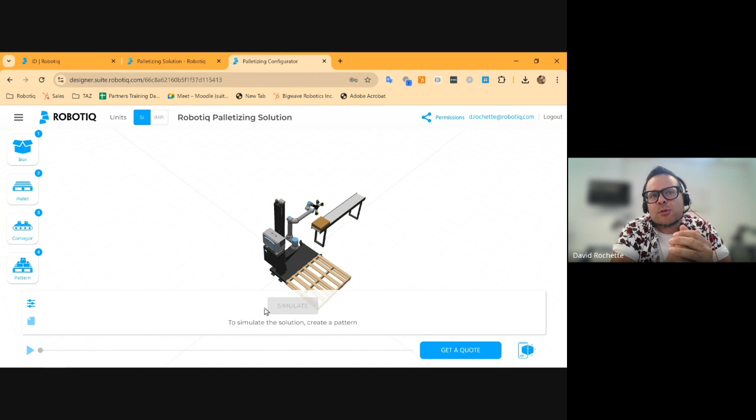At the bottom, for now it's grayed out, but you will eventually see the simulation results. You will see which model fits this application, and you'll see some KPIs as well, in the sense of key performance indicators, basically metrics like how many boxes per minute this configuration can do, and so on.

All right, so should we get started? Anything you'd like to add for now, Kendra?

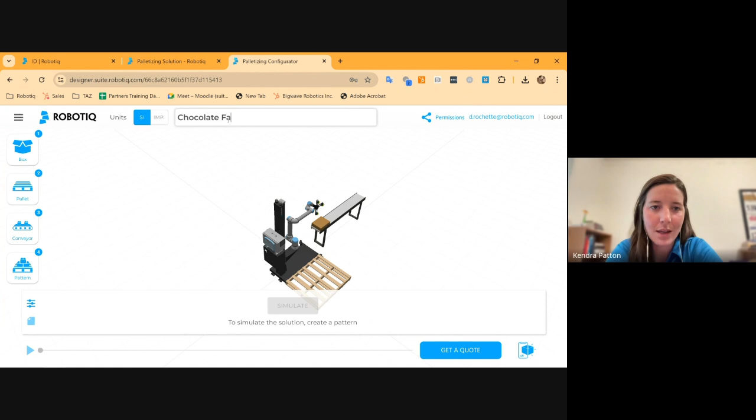Just an important note, the top bar also allows you to change the name. So if you want to keep track of all of your recipes and make it customizable for your customer, you could put in SKU 1, 2, 3, 4, or call it whatever you might call it, customer name and whatever describes that SKU you're running. So, Chocolate Factory X, and then the type of box that you're running. Also, note that the unique link is now created at the top.

So the URL is now a link that is custom for this simulation. Now that you've logged in and created a true project, it can be shared directly with the customer as well. That's another way to share, just something different I wanted to mention.

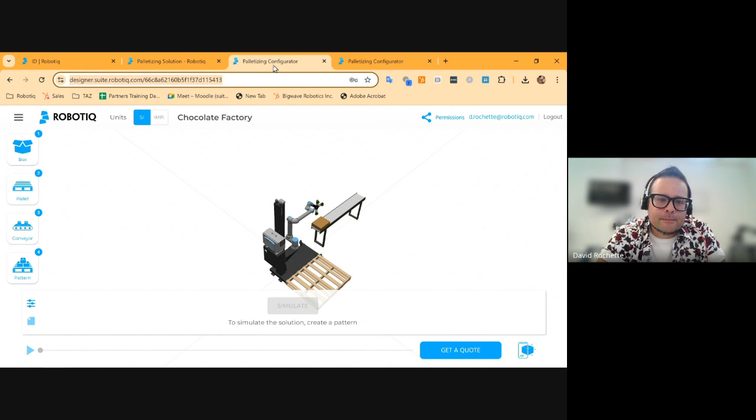I'm showing here that you can copy and paste that link in another browser or tab, and it will take you to that exact simulation. All right, let's go back to our main page here, Chocolate Factory.

So the first menu is where you can enter the box dimensions. We can stick to the default values for now, or just enter a mock value. If you put imperial, I have my go-to mock one, I can share that with you. If you switch over to inches, that's how my brain works. Go ahead and put 12 inches for the length, 10 inches for the width, and then make the height 8 or 9 inches, something like that.

The weight is a really good indicator that will lead to a different model of palletizer. So maybe we put in 30 pounds in anticipation of trying to... actually, would you do 20 pounds, David? Then it'll show both options.

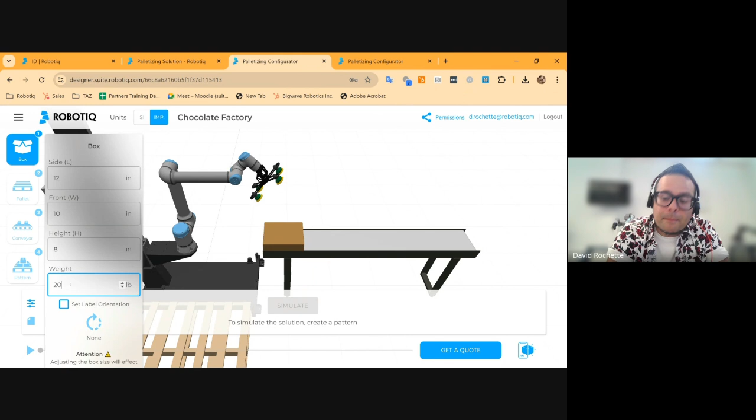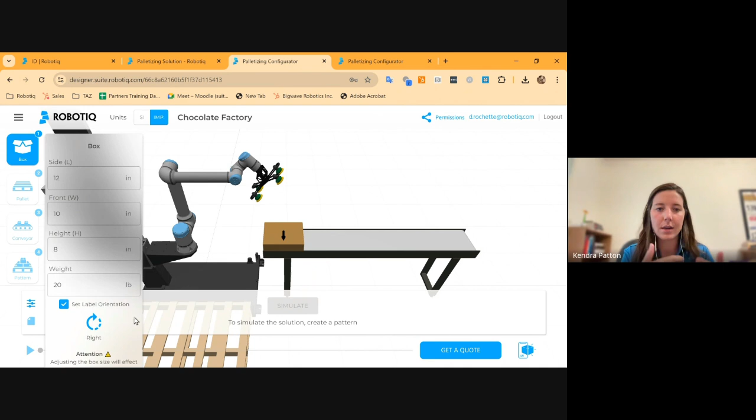And then if you set label orientation, that's an important thing to show as well. Once the weight is entered, the label can be set to a certain side. In the food and beverage and pharmaceutical industries, we see the need for a label to be set on a certain side is very important. That allows, when you build out your pattern, the arrow will indicate exactly where that label needs to go. So in this case, the side of the conveyor, it's coming down, it hits a label before it gets to the end stop. That's perfect.

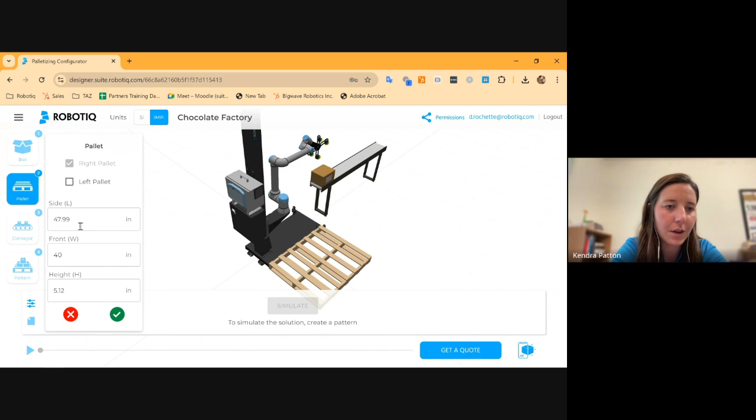There's a button to accept that editable box. It seemed to not want to show that on David's screen, but that's perfect. And then for the pallet, if we make it 40 by 48 inches, it defaults to 47.99 or something like that, so if we come in here we can make a typical 48 by 40 inch pallet.

In this screen, you can also choose the left and right pallet. So maybe select the left pallet as well. If you're trying to analyze the full scope, most people use both pallets, so I try to always put left and right in there as well. I think that should be good for that, David.

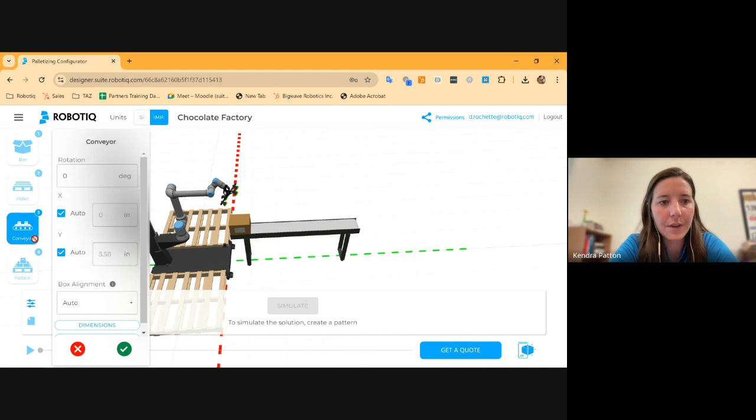And then the conveyor, maybe just pop it open. We don't need to make any edits, but the conveyor will automatically default to the width of the box, so that's kind of the auto default. But again, if you want to rotate it 90 degrees or change the distance away from the palletizer, if you're trying to replicate exactly what the customer has, that's all possible in this screen. Look at that, that's a great indication of how it can be reoriented as you see fit for the project.

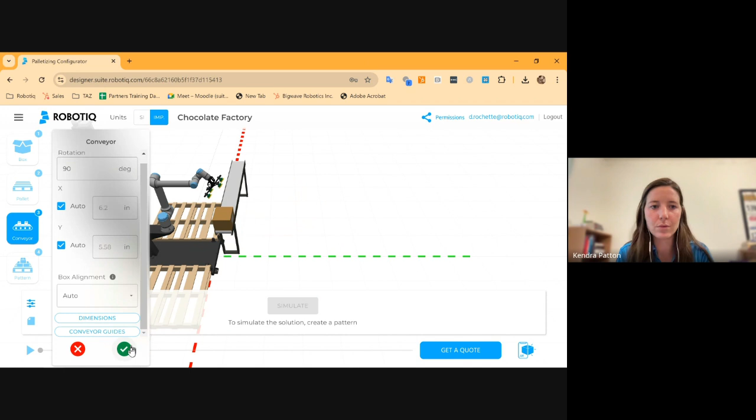And then if you look at the pattern, the next thing we'll do is build out our pallet pattern. This is probably the most important part and what helps customers really visualize how it could be their project. If you want to walk through this, David, I think you probably know best about how all of these buttons work now, but essentially adding one box at a time is the default, right?

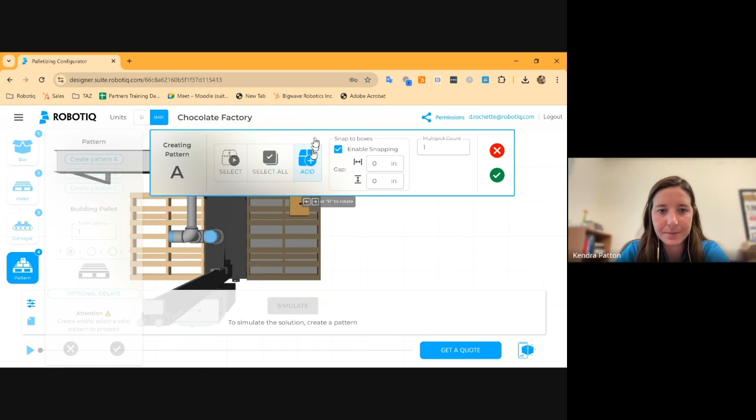Yeah, exactly. So here... sorry, there's a little bit of a lag. Okay, so adding boxes, this button will let you add boxes, and then you can simply drag and drop it on the pallet.

The arrows will allow you to rotate it, right? So you want to show the label on an outward facing edge of the pallet typically. So then I can simply go and click. If two boxes are overlapping, they will show as red, and the system will not allow me to place it there. So I can simply go ahead and make the pattern.

Now let's say I wanted to have a standard or regular gap between the boxes. Let me place this first one.

By default, snapping is enabled, so it will automatically try to stick to the edge of the existing boxes or the edge of the pallet. But I can also add a gap. Let's say I want a half an inch gap in X and Y.

So now it will always snap to half an inch from the boxes that are already there. That can be an interesting tool if you know you're going to have gaps, or if you want some gaps. Now let me just select all and delete them.

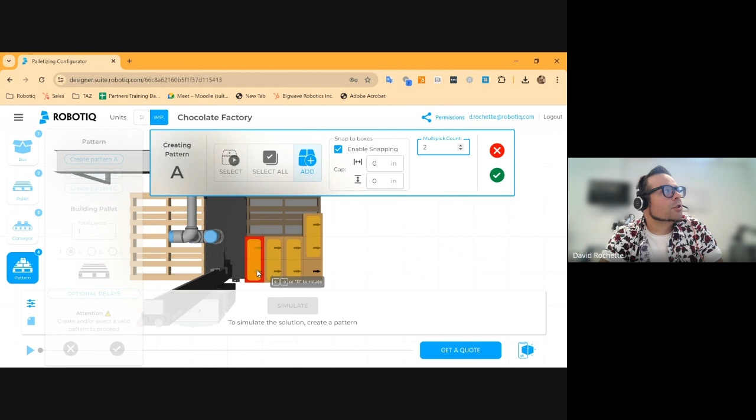I'm just going to go ahead and put some of those. A really important thing is you'll notice that the short side is connected to the other short side of that - it's called short side leading. That's how it's coming out of the labeler, and the two sides are both the short sides.

If for multi-pick the length is too long, picking two at a time doesn't seem reasonable. In that situation, you'd go back to the box screen and switch the length and the width, and that'll force those longer sides to be side by side.

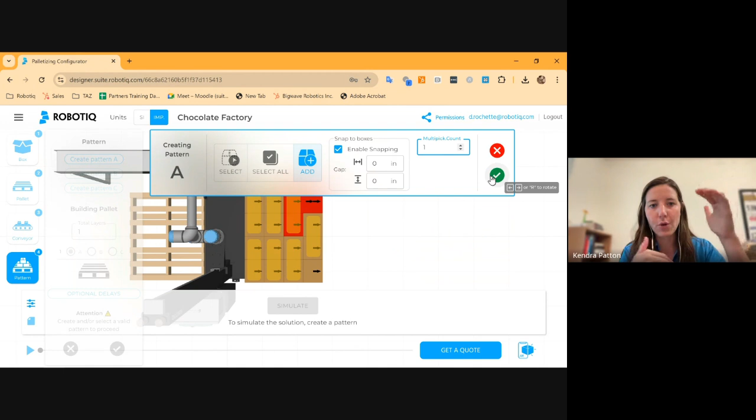That's a great example of picking two boxes at a time, and then building out the second layer. If you had alternating layers, you can go to Create Pattern B, and a really cool new feature is the ability to copy your pattern A.

If you had to mirror it or rotate it, you could easily do that in this area, which is awesome. We've been wanting this feature for a very long time.

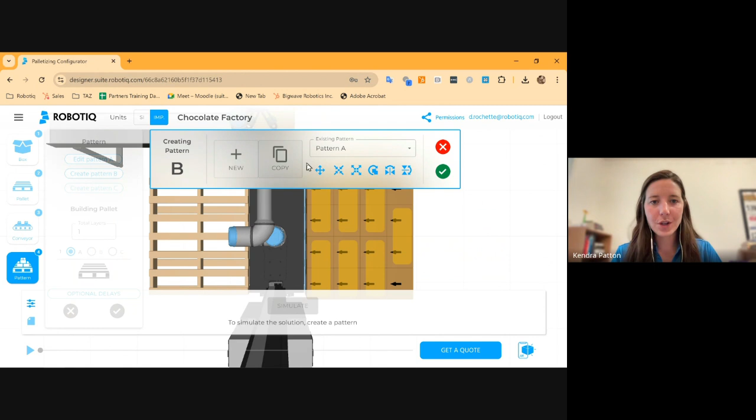So then it could be interlocking, and you can rotate as needed with these different tools. We don't need to go through all of them, but you'll notice you have the ability to select the whole thing, move the whole thing, rotate accordingly, instead of sitting there doing each individual box.

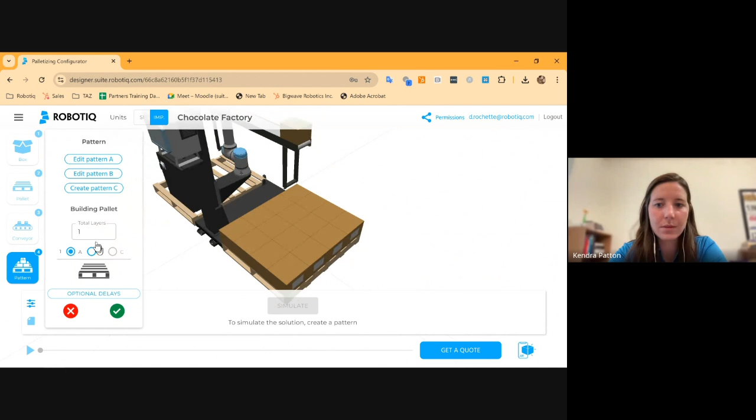Often we see A-B rotation in the different patterns, but we also have the ability to do a pattern C. So if the last layer is like a partial layer, we can represent that in the tool as well. Let's just put in maybe six layers, and then we can show how that populates the alternating A-B.

You could always come in here and alternate A-B. I don't think we created a B pattern, so we can keep it as A for this representation - very easy to indicate that, and customers talk about that often as well.

Oh, you did put a B in there. Oh, perfect, yeah, I did. Very good - we got alternating A-B then.

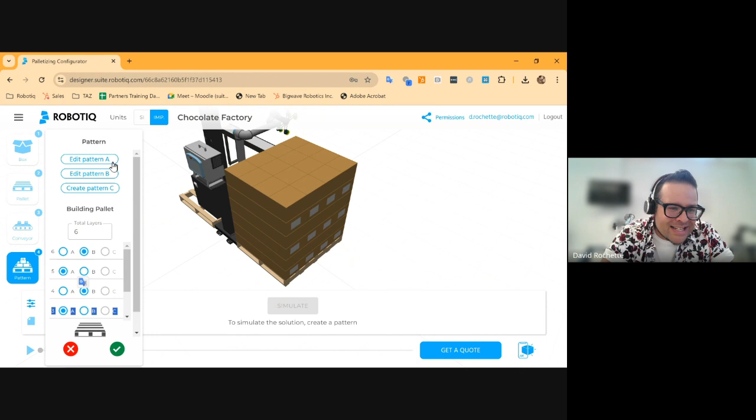Maybe just one last quick thing regarding the patterns - some interesting features. When you select all, you have the ability - now the pallet size won't allow me for now - but you have the ability to center everything on the pallet. So if there were some gaps around it, it would center everything.

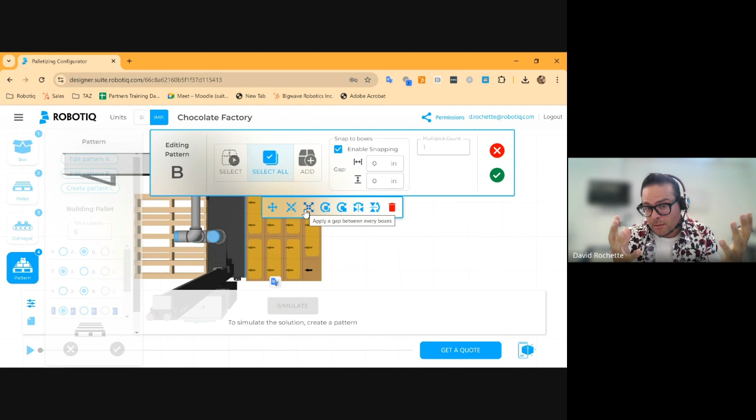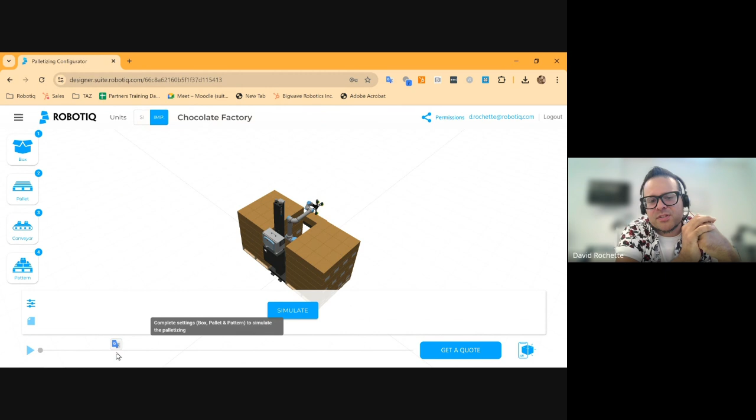All good, right, so we have our layers. We notice that we can create up to 3 patterns, which is sufficient in most cases. On the actual palletizing solution, the real one, you have the ability to create as many patterns as you want. But what we typically see is 2, an alternation of A and B, and sometimes a C1 for a last layer that would have less boxes, for example.

Alright, so the very next step, good. Once all of that information is entered - box, pallet, pattern - then we can go ahead and hit simulate. And this is really the moment of truth. It's going to pick the best model it sees to represent what information you put in.

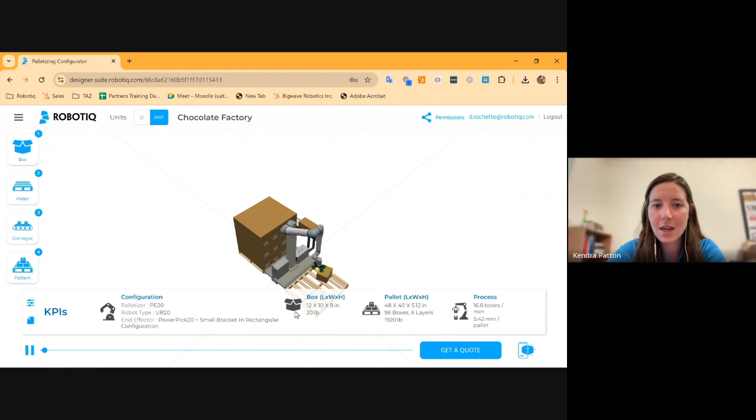So if you recall, we put in a 20-pound box, which you think fits the UR10. But in this case, we're picking 2 at a time. So because of that, it defaults to our PE20 model, which is represented very well here.

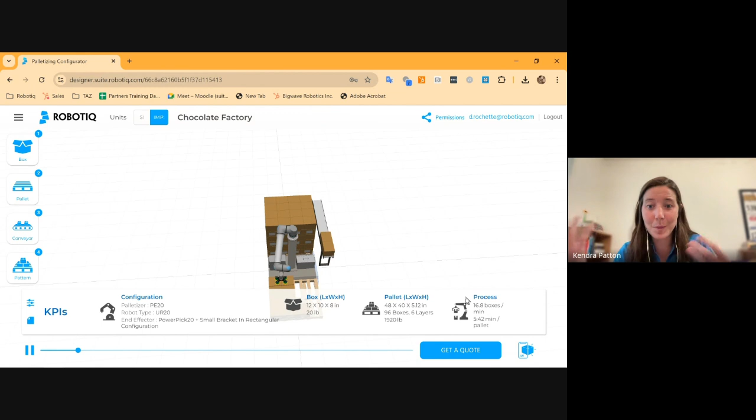So to David's point, it shows exactly all of that KPI information. What's really impressive is you see the output of like 16.8 boxes a minute. In the past, with limitations of payload, we were not able to really exceed 10 cases a minute, 11 cases a minute. Now, with the ability to pick multiple cases at a time, we're now in that upper range of 15, 20 a minute in different instances.

And that's really opened the door to a lot of situations where we could not provide a solution in the past. We now have the ability.

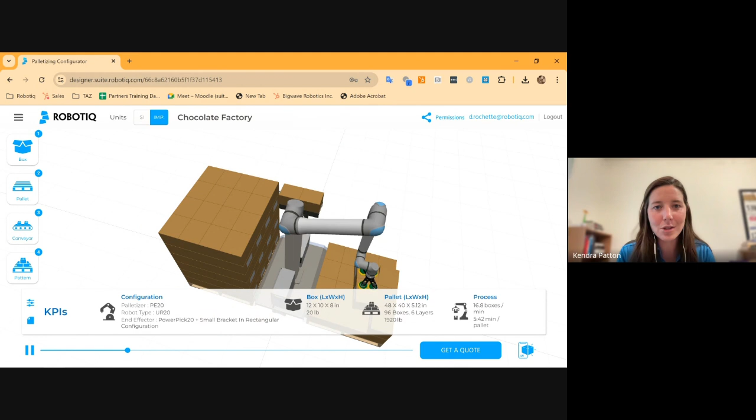So this is a great tool to use to represent possibilities with customers. The hardest part is really getting that information from them to then generate this. So I often give them an example of one that could be used, but ultimately that link at the top is a live link that can be shared accordingly with your customer.

And you could do this over and over again for all of the different SKUs. Or, as David mentioned, the multi-recipe feature is a good way to organize if you know you have multiple SKUs on one line. And what you'll see here is the palletizer that was chosen.

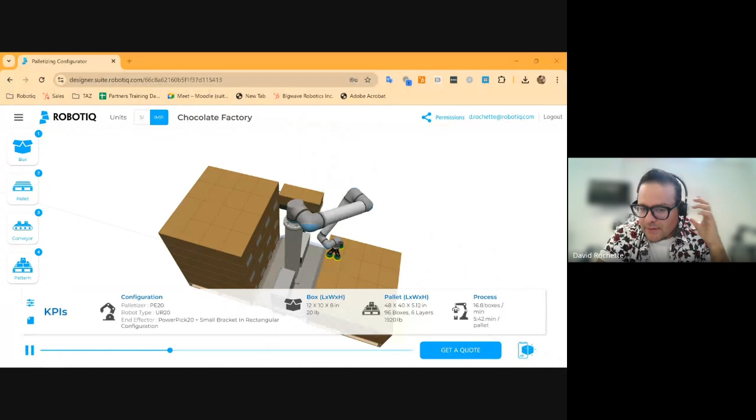It doesn't mean this is the only one that will fit, but it's probably the most efficient one that has the best cycle time for this kind of application. You will also see the robot type and the end effector.

Now this one can be a little bit hard to grasp at first sight if you don't know our family of grippers. But basically, PowerPick is the standard vacuum gripper that Robotiq has designed for a UR20.

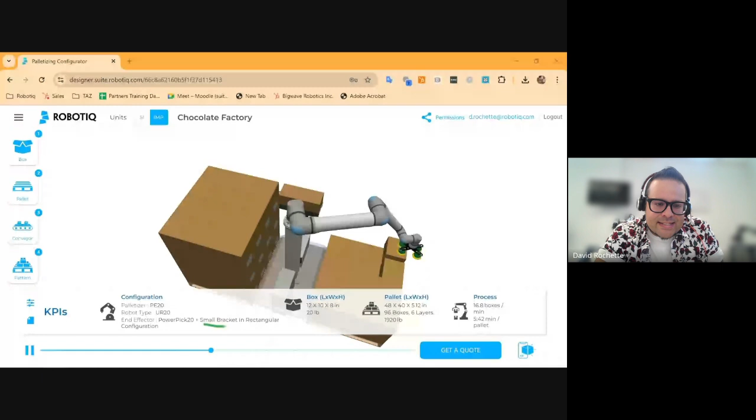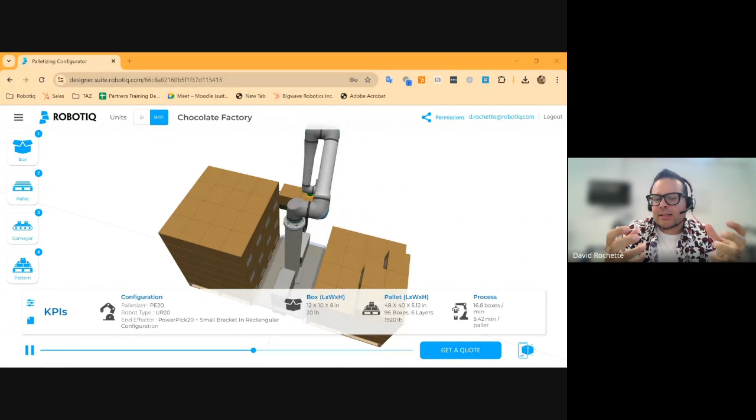Then it says small bracket. So we have to know that there's 2 configurations with smaller brackets and bigger brackets depending on box sizes. Now both brackets will come with a PowerPick kit. So all you need to know basically is that for this order or project, you would need a PowerPick 20, and then the small bracket in rectangular or square configuration are simply just how you assemble it, but the PowerPick kit itself will include all of those configurations.

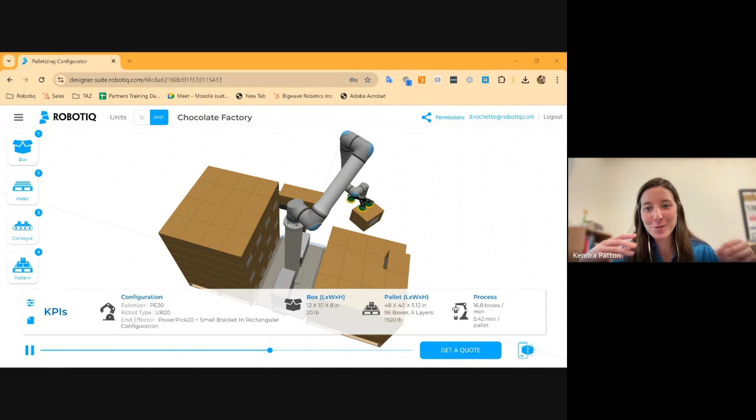Great point, David. And the more you analyze, you might see that might not be the best gripper, right? The better gripper for a 20-pound case - you might not trust that 2 vacuum cups is enough to pick a single box, in your configuration.

So there's another hamburger menu near that KPI name that you can actually take it to the next level. And say you wanted to look at a different model - as David mentioned, it just kind of defaults to what is best for throughput. But in this section, you can go ahead and create, you could select the UR30 to generate an AX30 model. You can indicate different end of arm tooling.

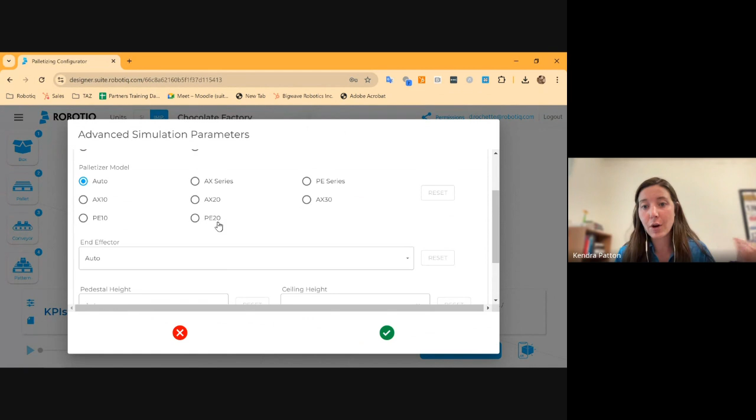So say you had a different name brand gripper off the shelf and you had the TCP information for that, you could go ahead and enter it. Or if you wanted to take a look at what this would look like with a larger configuration of PowerPick as well. So a lot of different options in this advanced menu.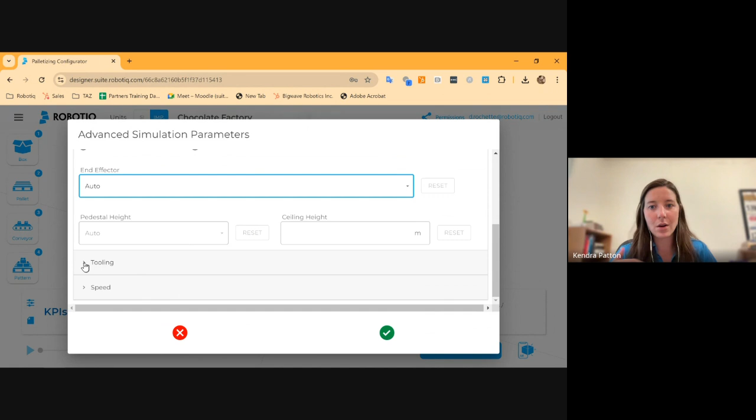And honestly, I'd say that our coaches are really good at taking a deep dive into this. So if you get a simulation that pops up and says it won't work, feel free to share the link with us. We're more than happy to figure out how we can get it to work, because we know all the ins and outs. And also, feel free to go into this advanced screen and start nitpicking a few of the different items as well. You'll see kind of the subset of areas. Speed is very important as well.

So say the customer desires a rate of 17 boxes per minute, and I know that we're at like 16.8. You could come in here and increase the default speed without the payload to maybe 2 meters per second or 3, and now we will meet that rate. So that kind of shows different ways in which we could meet the customer's needs.

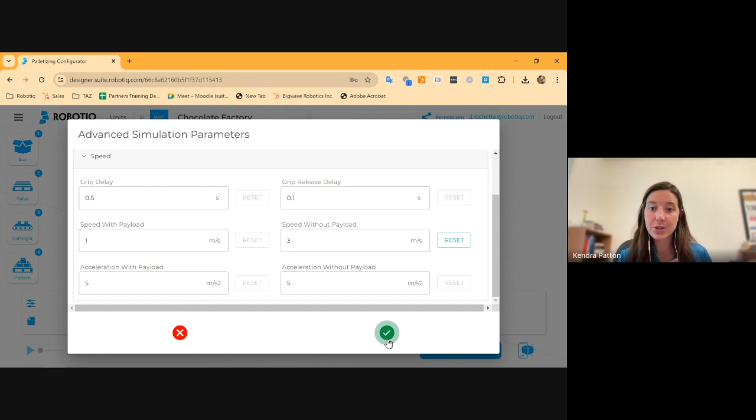Understanding the speed settings as well, everything defaults to 1 meter per second, which is that collaborative guideline. So every simulation you do will result in that default unless you go and edit it. In general, the threshold is about 2 or 3 meters per second, where it kind of stabilizes, and it can't get from point A to point B any faster than that. So that gives you a guideline on what you could enter.

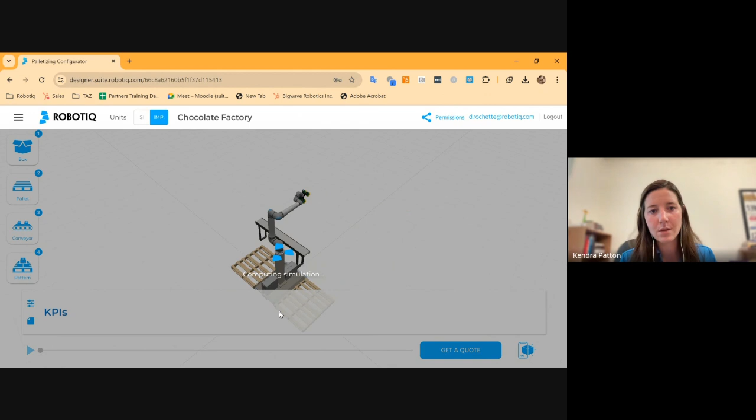But now you can resimulate with those new settings, and you'll notice some changes in the simulation as well. So it becomes kind of a live edit. Now we're meeting that rate the customer desired, and the new link exists with those edits.

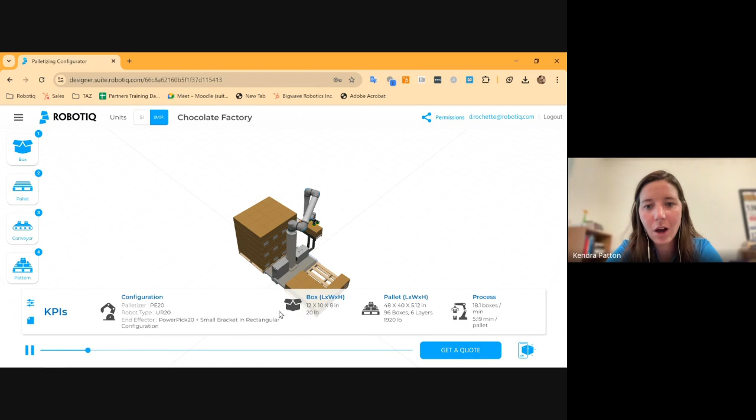And another piece of what you see on the screen here in the bottom corner says AR, that's augmented reality, right here. It says to scan this QR code to see it in augmented reality. So that's basically with your cell phone, you can take your cell phone. I'm gonna do it on my end.

So if you're at a customer and you want to scan that, that's what will show up as default if you go to it on your phone as well. Then you can actually drop the palletizer into the space that you are in the factory. So if people want to visualize outside of the simulator tool but bring it to reality, you size it based on the ceiling, you size it to the room, and then you can drop the palletizer into the space.

It's just kind of a fun tool to share with engineers if you're on site. And secondly, you could take a screenshot of that in the space in which it's potentially going to be deployed. It really helps with those future conversations and being able to share that. So we use this as a tool, one of the more advanced features we offer within the simulator tool as well.

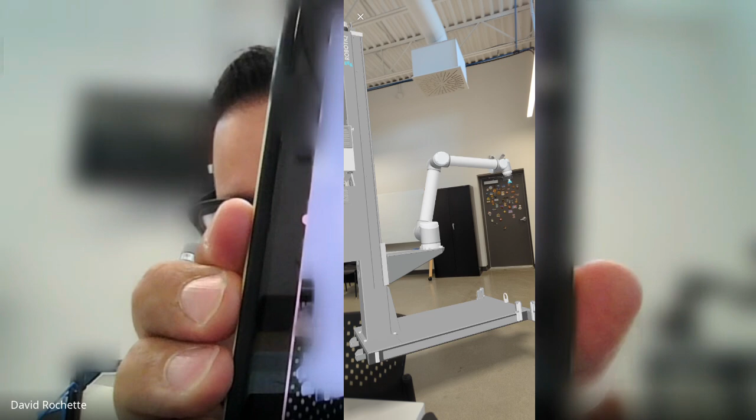So I'm trying to show what you can get. It's gonna be blurred, but yeah. So he dropped it into the space, so it's kind of right next to me. Very cool, very good.

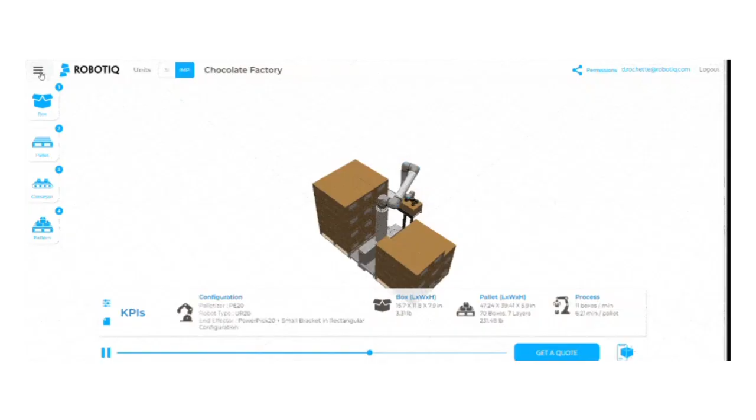I'd say the last thing to share, if you want to learn more about this, we do have an advanced training coming up that will go over a lot more of the details. So if you go to that hamburger menu again, David, up in the left, the more advanced training is going to cover importing and exporting. So say you have access to TOPS program or CAPE program, you have the ability to import, and we'll go into more detail with that.

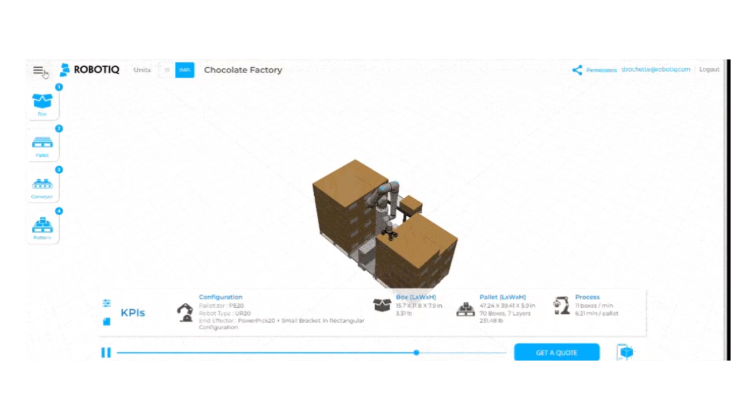We will also cover how to export for an actual program. So now we have the ability to take a simulation and export it as a URP, which is a program for the UR. We'll show that as well in this advanced programming section, and then go into more detail about the multi-pick capability, or multi-recipe information as well.